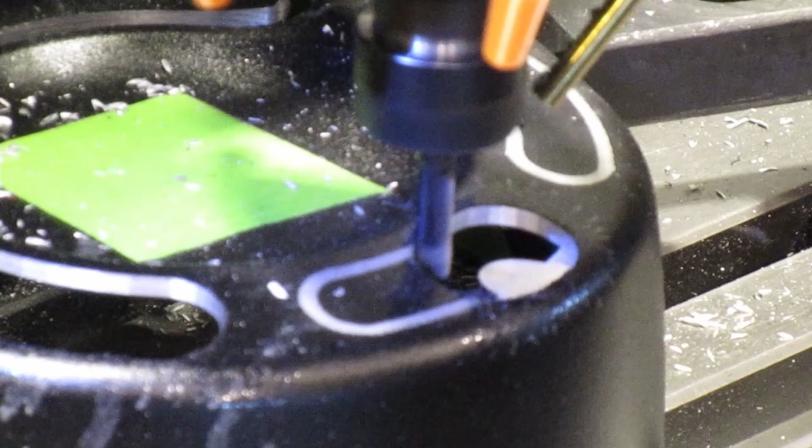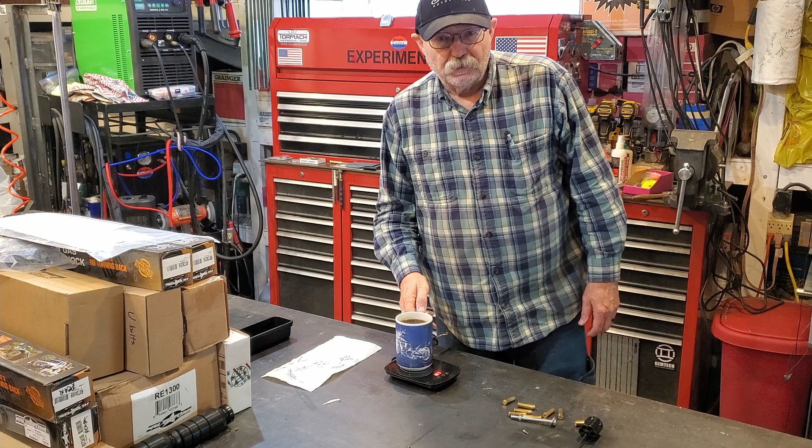Ideally I should be working on putting all new front and rear suspension on the Jeep, but I'm procrastinating, so I've come up with another little project I've been wanting to do for a while: a steering wheel knob. I'll put a couple of videos in right here to show you why people buy them and use them.

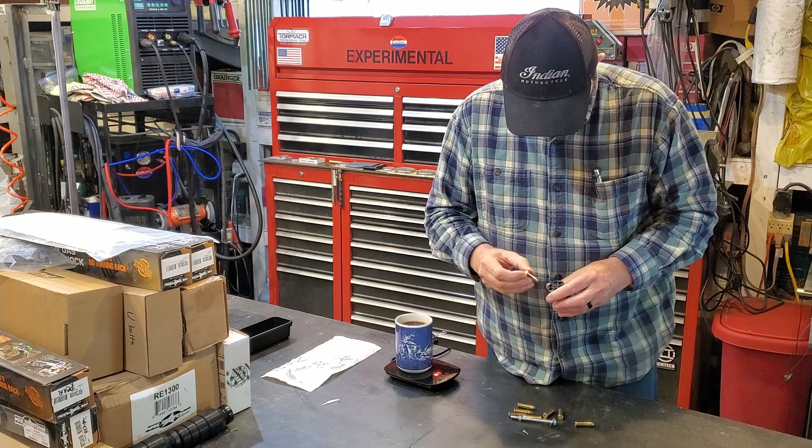So I started thinking about what I could make one out of, and I found a revolver cylinder on eBay. It's for a 6-shot .38 special revolver - probably, it said unknown model when I bought it. In my mind these are live rounds, but I will not use live rounds in the final piece. I think it'll make an interesting looking steering wheel knob. I'll pull the bullets and then fill each case up with some WD-40, which makes the primers inert so they won't fire. It'll be totally safe.

But anyway, I plan on making it out of this revolver cylinder. This cylinder has a little star which allows you to eject the rounds, so I'll want to retain that. I'm going to get rid of this shaft.

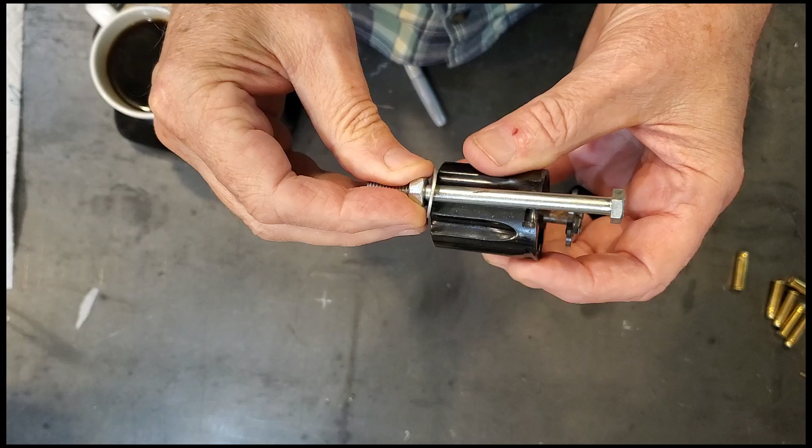This thing will rotate on a 1/4-inch bolt, so it'll go in something like this. But I plan on cutting the bolt off, obviously, and then hooking the star to the end of the bolt. My plan is to drill and tap 4-40 for this little machine screw, and it will go through the star and bolt into the end of the bolt.

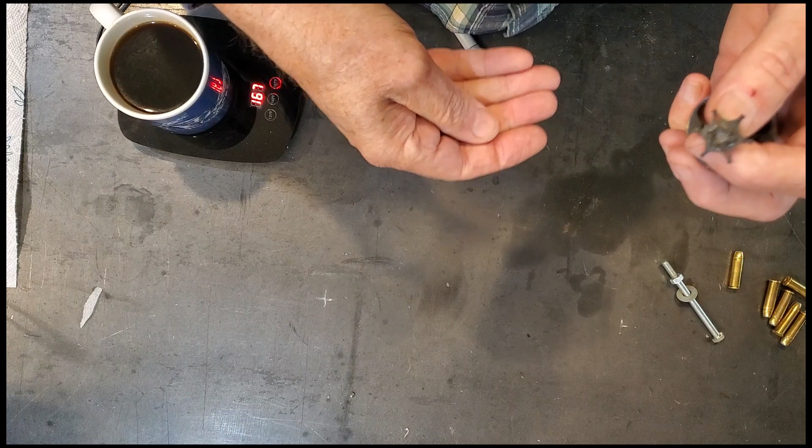Then I will cut off this shaft on the bottom and make it all smooth. So we'll just have the star by itself with a hole in it, and it'll be held on with this little 4-40 hex head cap screw.

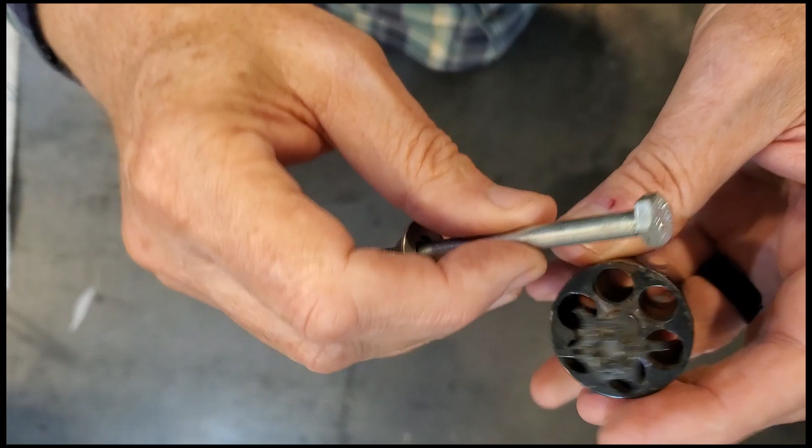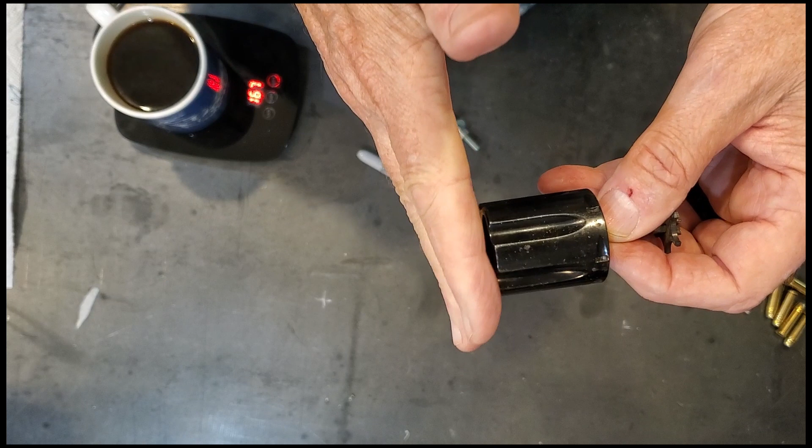After I get this cut off, then I will drill the center of this cylinder for a smooth fit on this 1/4-inch bolt, so it will rotate on the bolt. This thing is not going to go 100 miles an hour, so there's no need for a bearing. Then I will probably recess into this end a space for this washer and this nut, so that it will sit pretty flat on the little plate that goes around the steering wheel. So that's the current plan. We'll see how that works out.

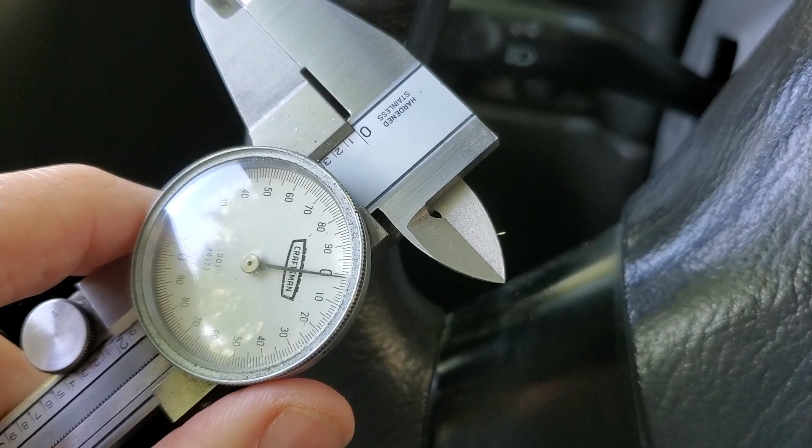And then with my dial calipers here, I'm going to measure the width and the height. So here's my little cheat sheet. The steering wheel is 1.180 left to right, and 1.000 top to bottom, and it needs to fit into across here and in that little corner. So I should be able to transfer that to some steel.

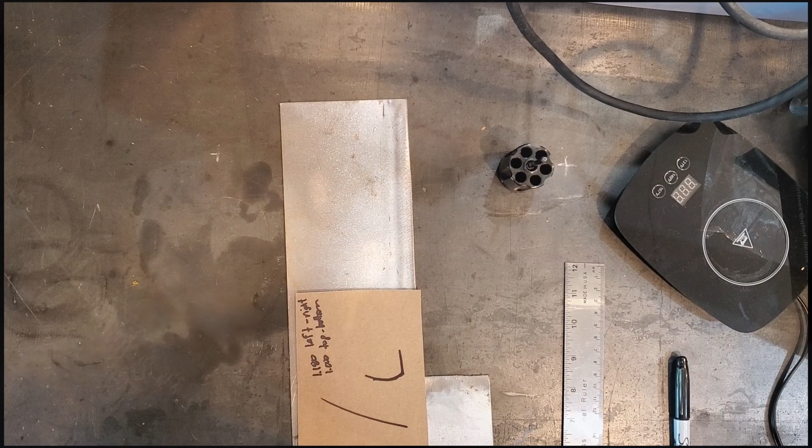Okay, we're back in the shop now. I've got a piece of 16 gauge here that I think I'll be able to use. And of course, here's my little cylinder. So let's do some educated guesswork here.

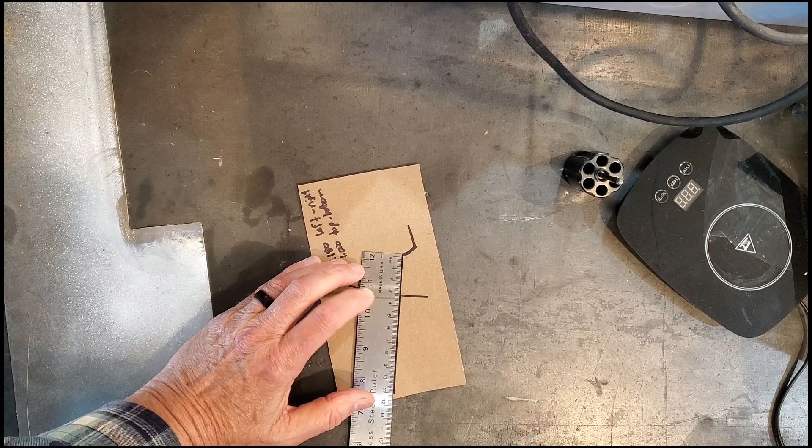So if this thing went across the steering wheel, I want to go across perpendicular to this edge. So let's say we do this, and we'll make it about 3/4 of an inch wide. So we'll draw another parallel line here.

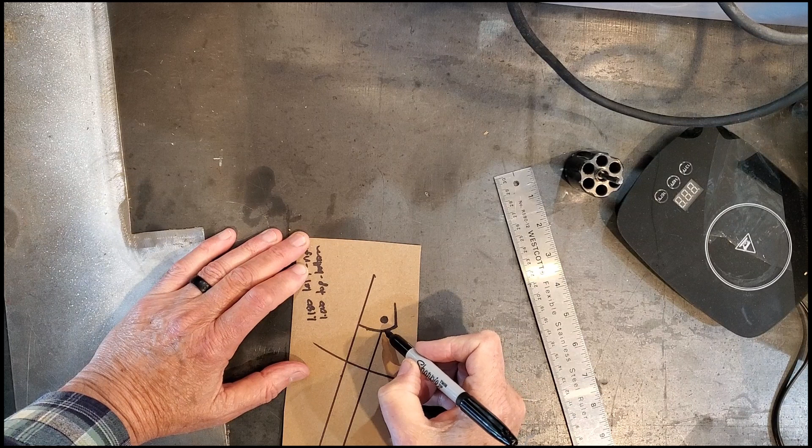And then I'd like the bolt to be about there, and it's going to be a 1/4 inch bolt. That's a 1/4 inch bolt right there. And so then the metal part can look like this.

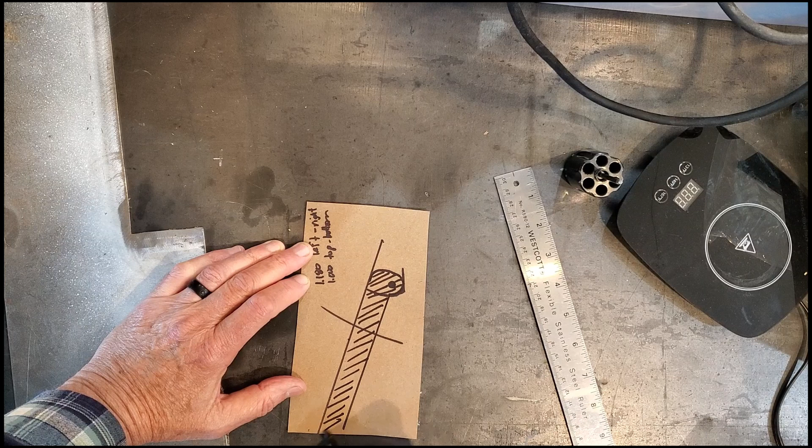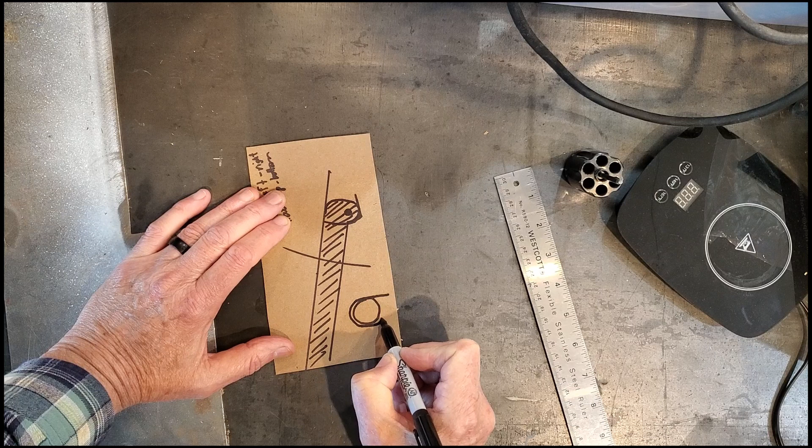And so this piece here is what I need. And of course, this piece sticking out here will wrap around the steering wheel. So if we look at the steering wheel from an end view, a cross-sectional view, let's say this is the steering wheel. This piece will go like this, around the steering wheel, back up and back over, and then the bolt will go through there.

That makes the knob flush with the top of the steering wheel, plus a little space, and it gives me a clamping force. And then if it looks like this on the top and the bottom, I'll be able to bolt the two together. So that's the theory. We'll have to see how well that turns out in practice.

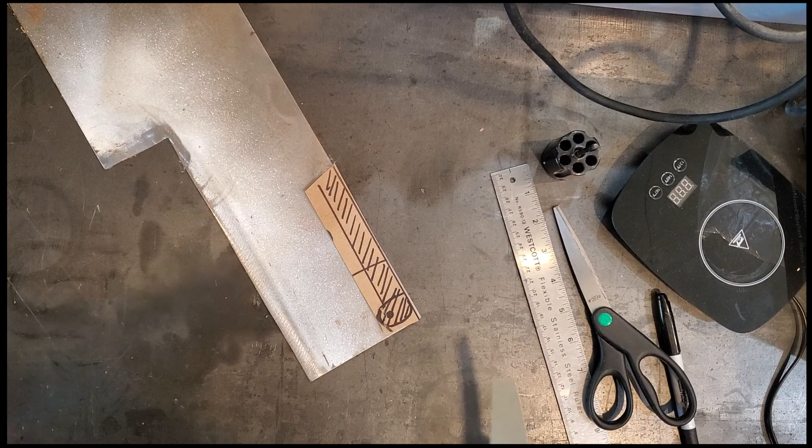So we've cut away some of the excess. This has to remain wide because I need another one of these features down here, but it's an unknown length. So I will basically cut it out wide, form it so that it matches the steering wheel and gives me that little step function right here.

And then I will build the two little bump out details into it. So that's kind of where we are right now.

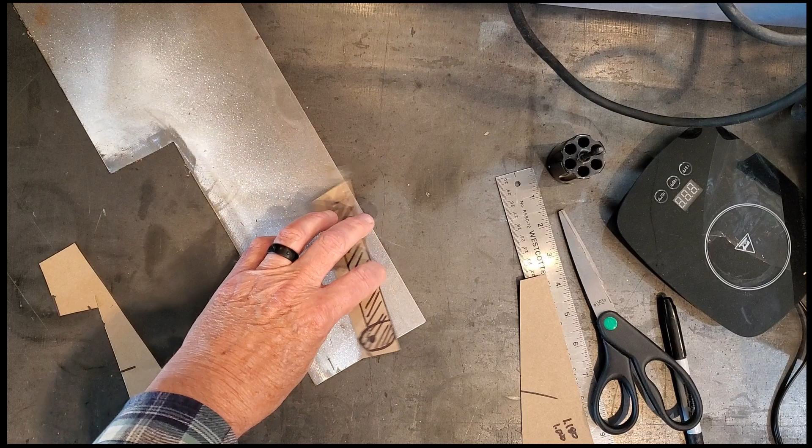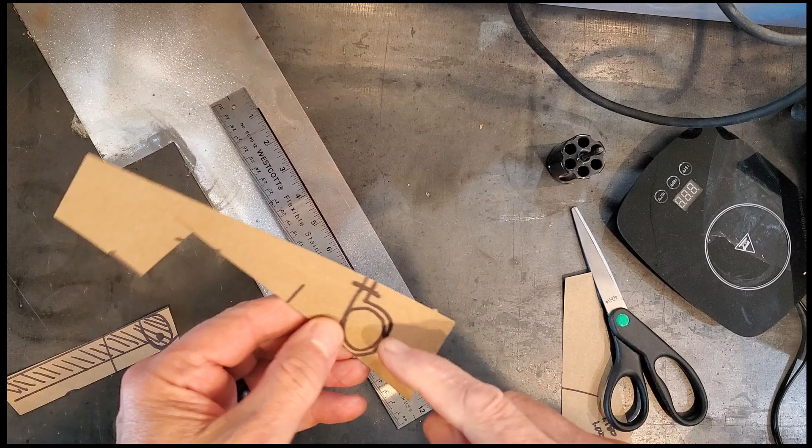So that's about 1 3/16. So we'll do 1 3/16 up here. We're just going to start with a 1 3/16 inch wide strip of metal. And I'm going to make it plenty long, since I don't know how long it needs to be. Since it's about 1 inch, that means the circumference is 3.14 inches, plus a step out there and a step out there, so 5 inches ought to be enough. We'll just start with 5 inches.

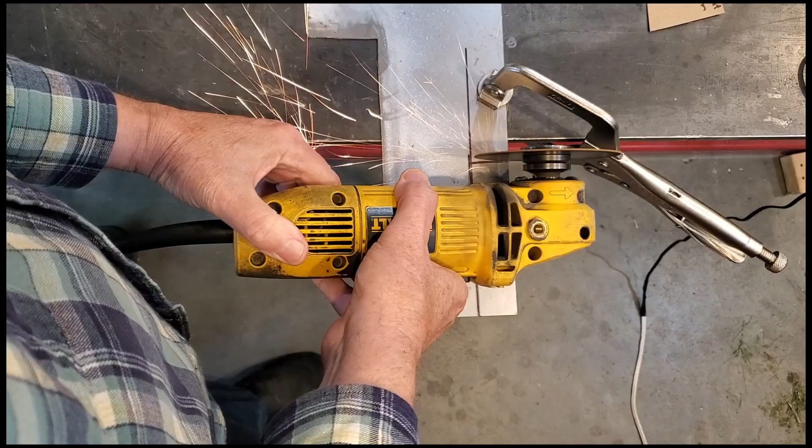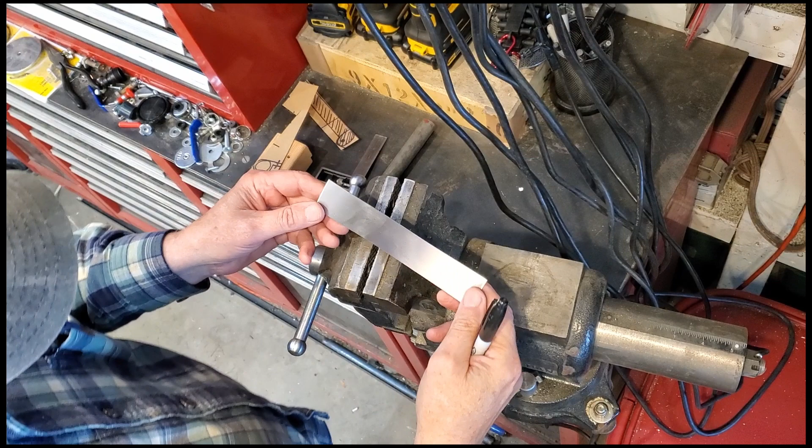Okay, we got our blank here, 1 1/4 by 7. I decided I really wanted a little bit more extra. So the first thing we're going to do is put this 90-degree bend in. It'll be harder to do after I get it curled up, so I'm going to do it first. Trimmed off. We'll try there.

So the best part about the first bend is you can't bend it the wrong way. Okay, square it up a little bit. All right. If you don't want hammer marks in your final product, well, use a piece of wood.

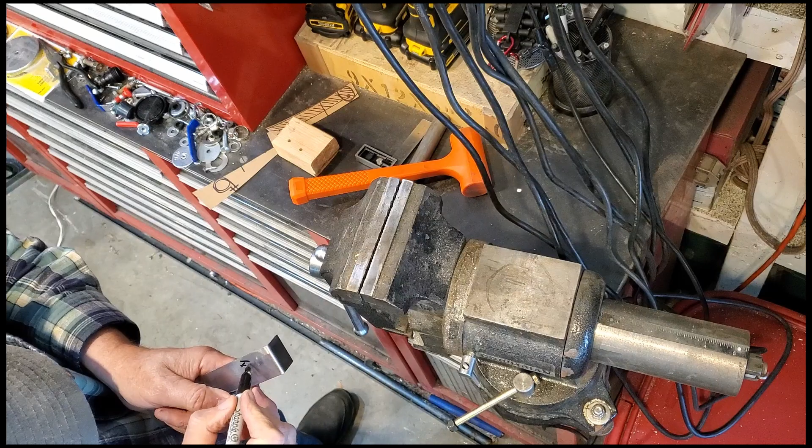And we want this first bend to be about 90. Okay, here we go. Pretty square. Oh, very square. Okay, that's good. Now we want this to curl up like this. So this is the inside. Okay.

Means I'm gonna bend it over a piece of 1-inch DOM tubing. It's a quarter wall, so it's going to be plenty strong. Stick it out a little ways. We will clamp it. That needs to be in, so I need to have this down. Okay.

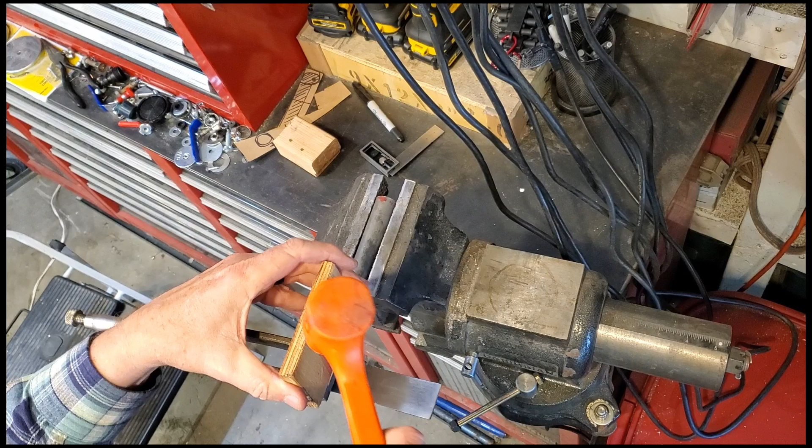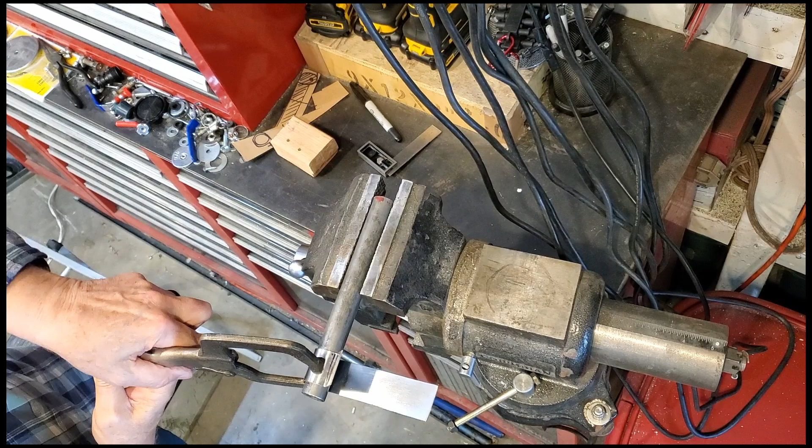All right, you're beginning to have the shape. Okay, see if we got the right depth. All right, we've got about 3/4 of an inch to this, which gives me plenty of room to clamp.

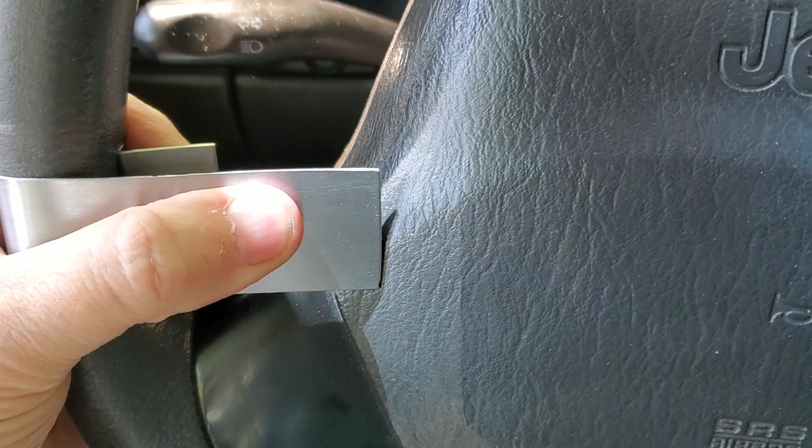So let's go try it on the Jeep and make some marks. And we've got the part partially formed. I'm going to have to open it up a little bit so that it will go around the steering wheel, and then we just force it back around. Got to have strong thumbs, apparently. Anyway, we force it back around. So here's about square with it. It's not quite square.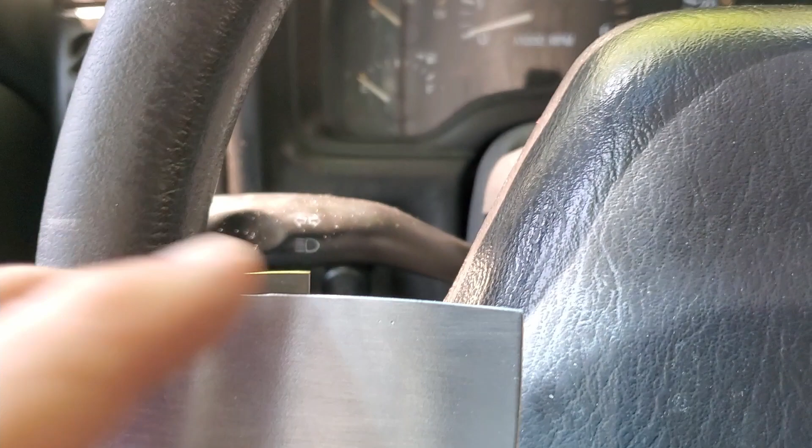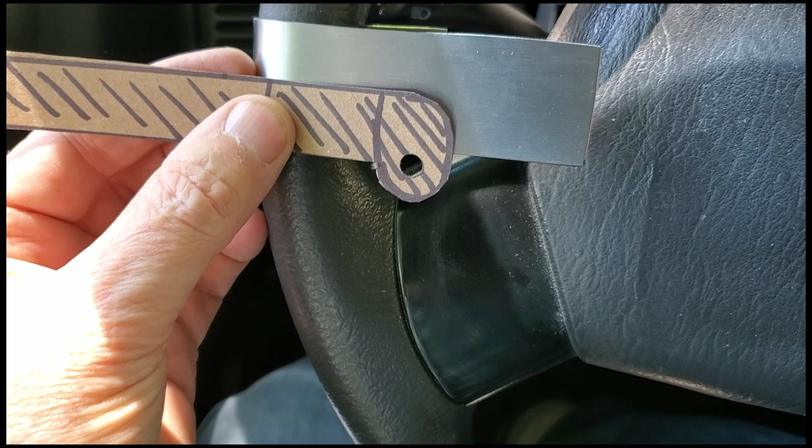But anyway, this piece is roughly where I want it, close enough for me to make some marks. I flushed out the pattern a little bit, trimmed up some of the edges, and punched a hole in it with a hole punch. I think I want it to go about there in real life, so if I move it straight up on the part, then that ought to be where I should mark it.

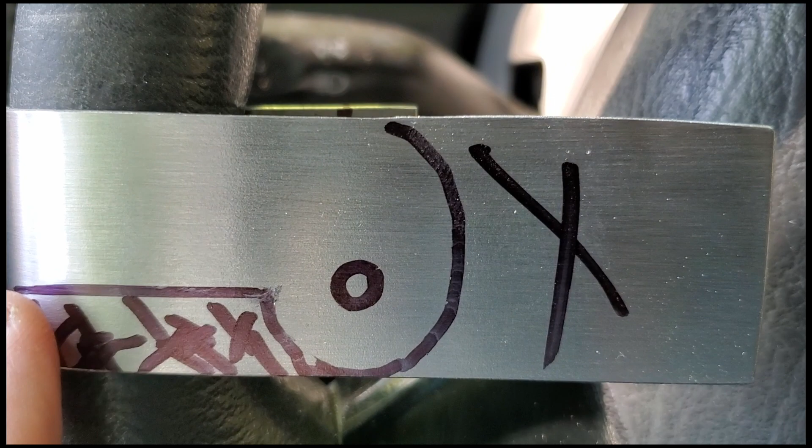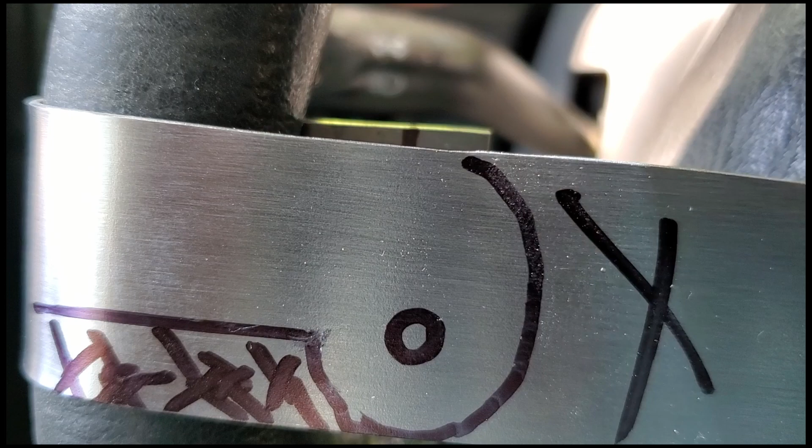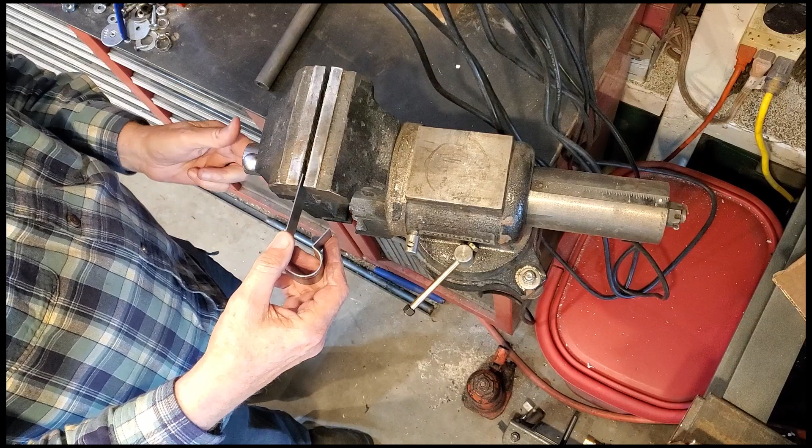After we mark it, we will cut this material away, put a hole, and then this material here will go away, and this material here will go away too. I marked a hole on the back, the center line of the hole, so that I'll be able to get it lined up correctly. So we're getting closer. Okay, let's cut the piece out of the big stock.

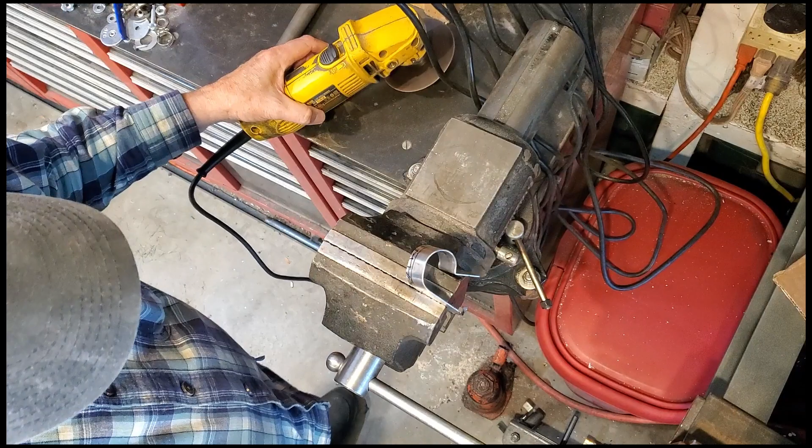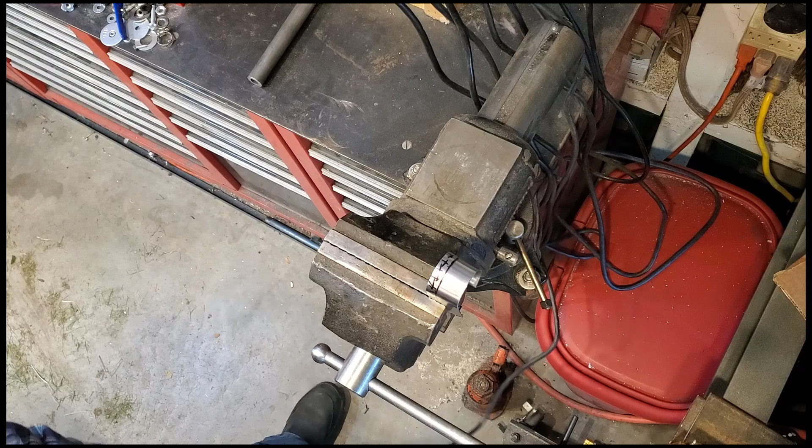Okay, now we're gonna thin it up a little bit.

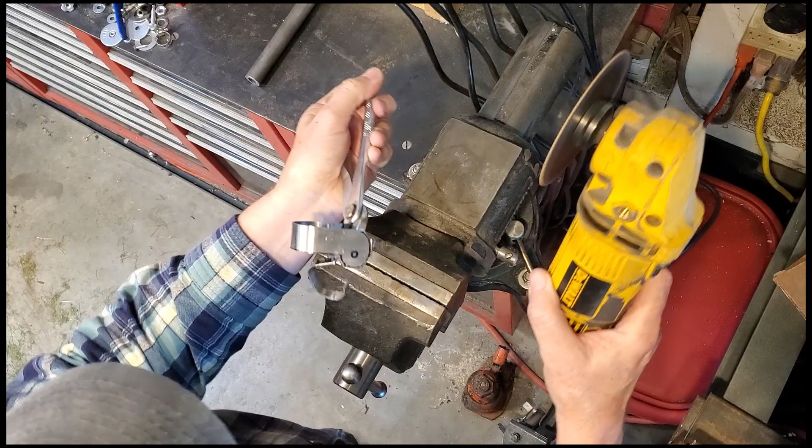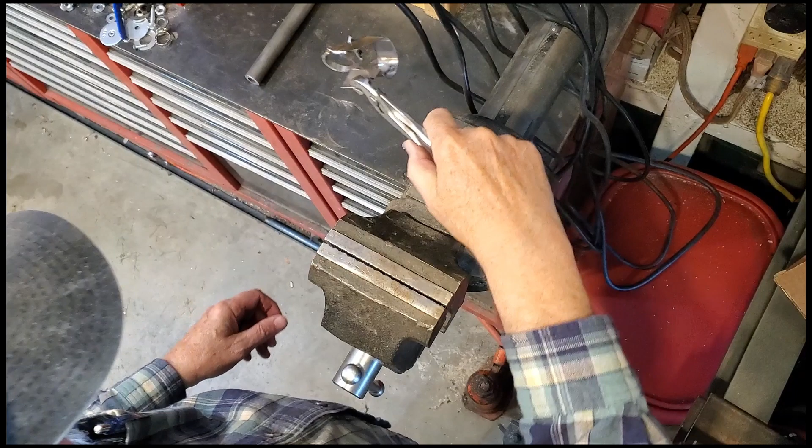Well, the garbage truck is here, but at any rate, we've got a general shape, and one of the things the belt sander is great at is cleaning these kinds of things up.

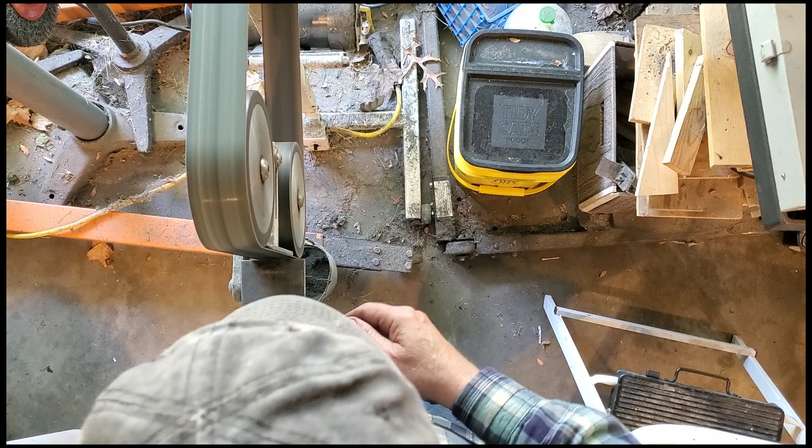So I'm going to do the top first, then I will drill the holes, and then clamp the piece together with a spacer, and then make the bottom match the top.

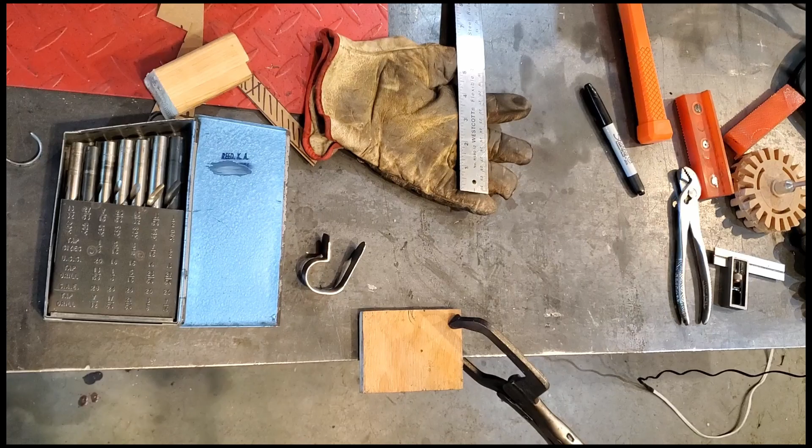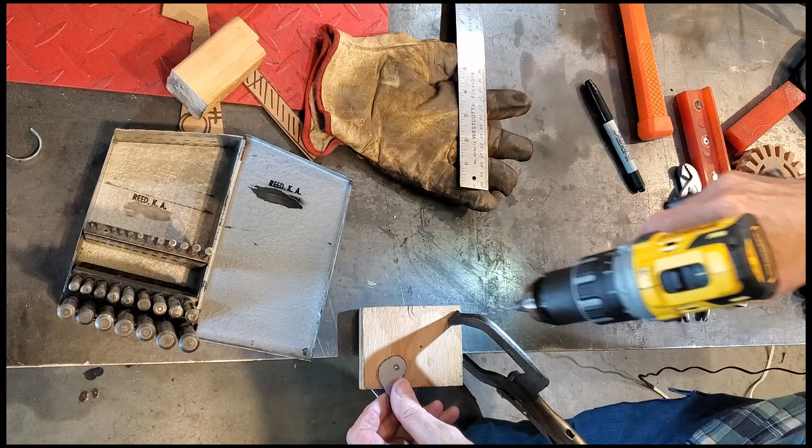Okay, we'll drill a pilot hole first, we've already got it center punched. Okay, that's a good hole. Now we'll drill 1/4 inch - actually, one size over 1/4, which is 15 thousandths of an inch over 1/4, 64th.

And this could catch and grab and rip my finger off, so we will use a pair of pliers. Nope, all was good, but I like my fingers a lot.

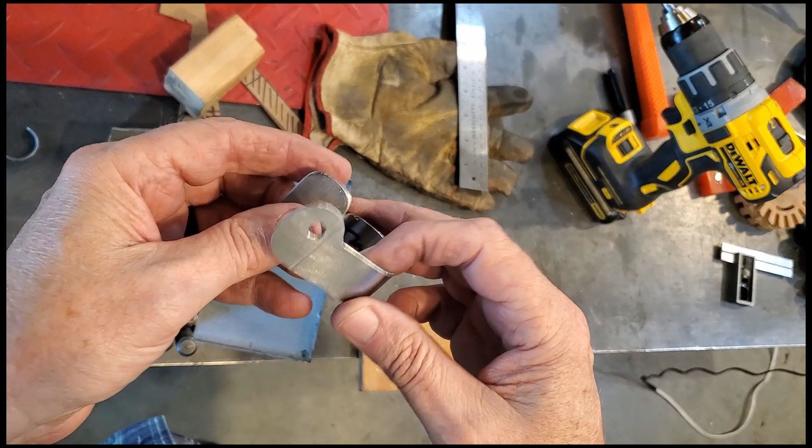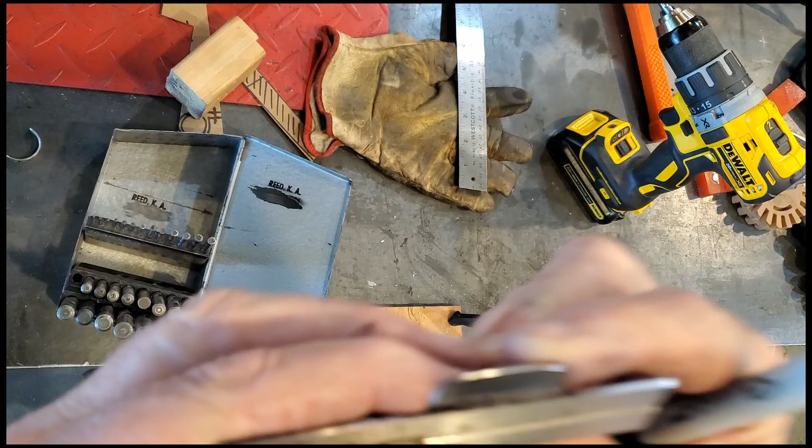Okay, we've got the edges cleaned up on the wire wheel and the Scotch-Brite wheel. They got one hole, and we know that that other hole is along this line.

So we mark this, and then transfer it to the other side, actually. There we go. And now we move over. Let's measure this - 13/16 of an inch. And we will have the position of the other hole, so they will be right above each other when the clamp is closed on the steering wheel.

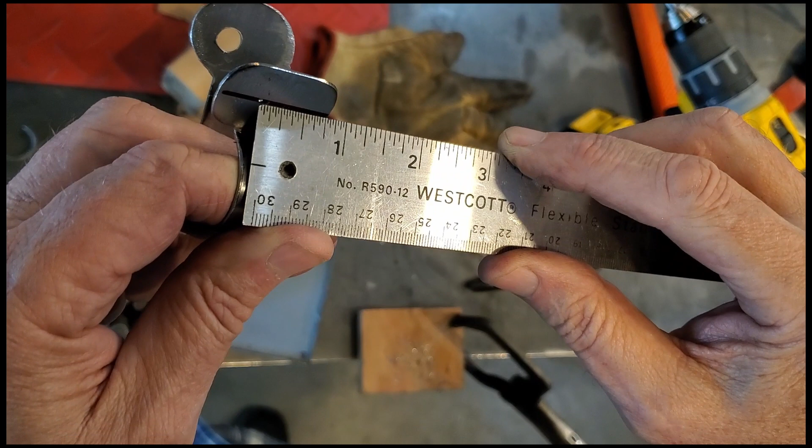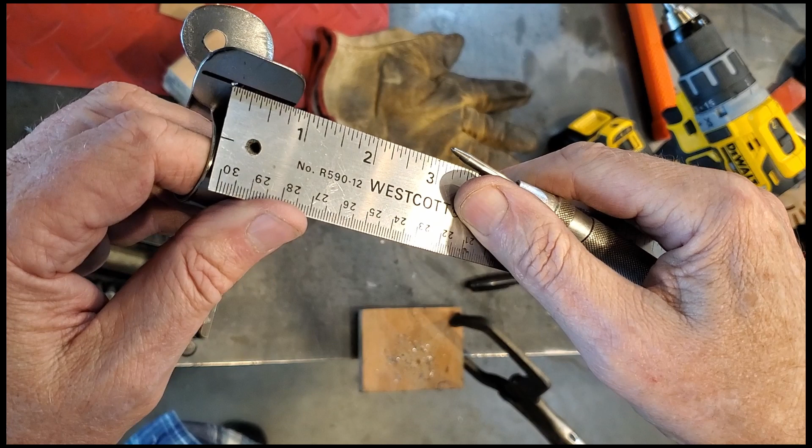Okay, now we check. Nope, the center punch needs to be moved a little bit. I don't know if you know, but you can move a center punch just by punching it again at an angle. So let's see if it's in the right place now. Yes, center punch is in the right place now, so then we can drill it.

Pilot hole first, and then 17/64. Next, with a pair of pliers...

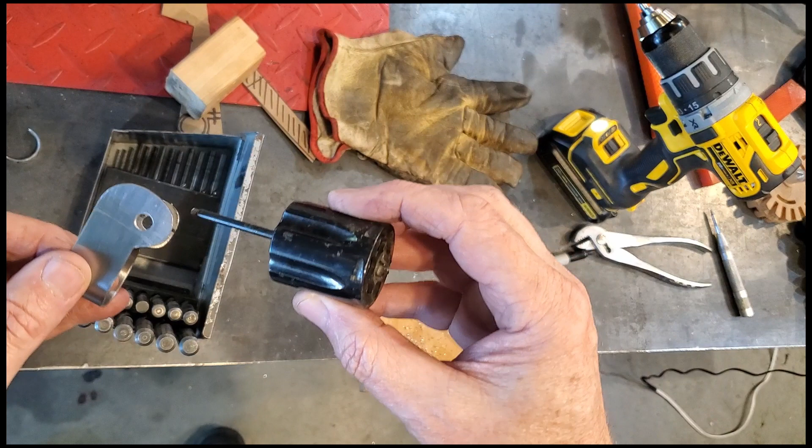Okie doke, that is going to hold my knob. I haven't got this piece machined yet, but it's going to look like this.

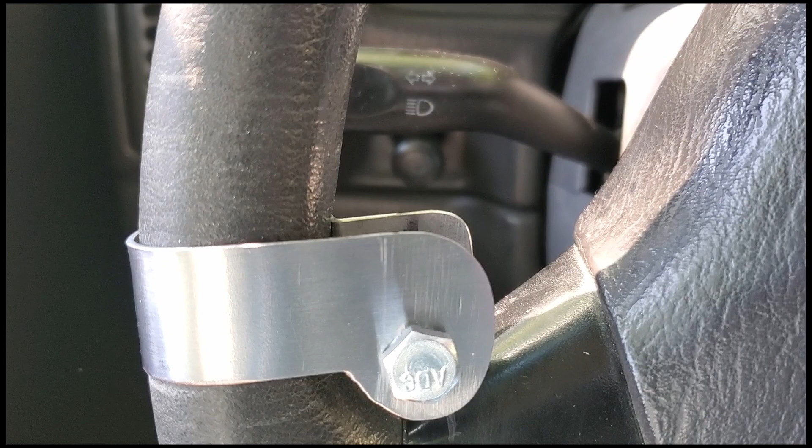Okay, a little video of the Jeep test. It looks like it's going to work pretty good. I still haven't trimmed the back piece to match the front piece, but now that I've got a bolt that'll go through it, I'll put some washers in there and do that. When it's all black, it'll probably disappear pretty good, not obvious to the observer. So I'm pretty pleased so far.

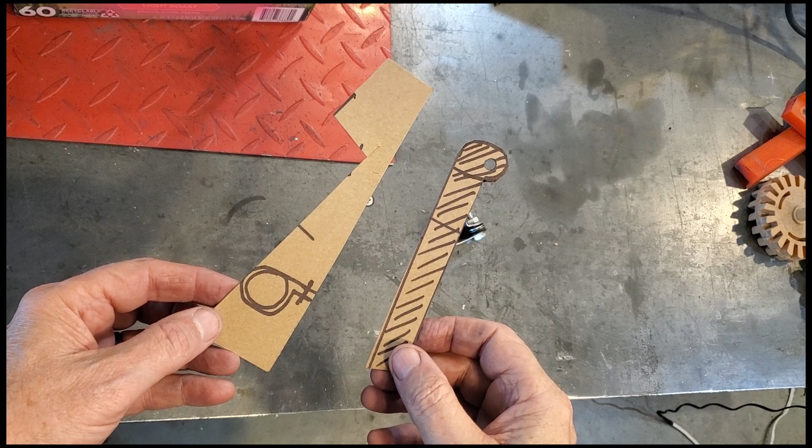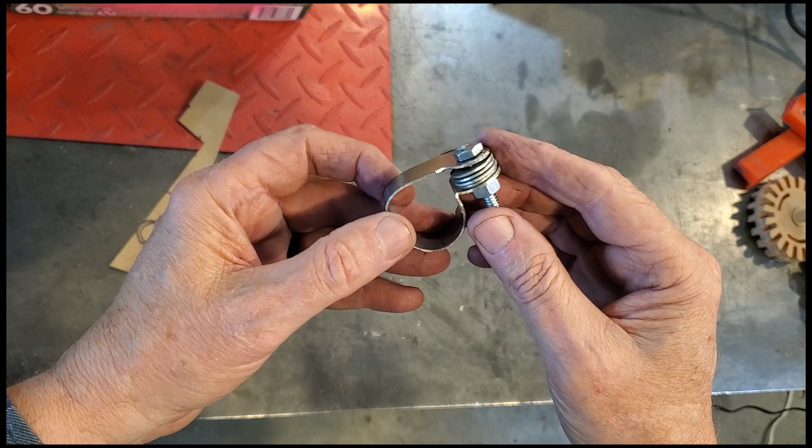Okay, we went from this to this in about an hour. It still needs the edges smoothed a little bit, and a couple of coats of black paint on it, but it is ready to receive the knob. Machining the knob is next.

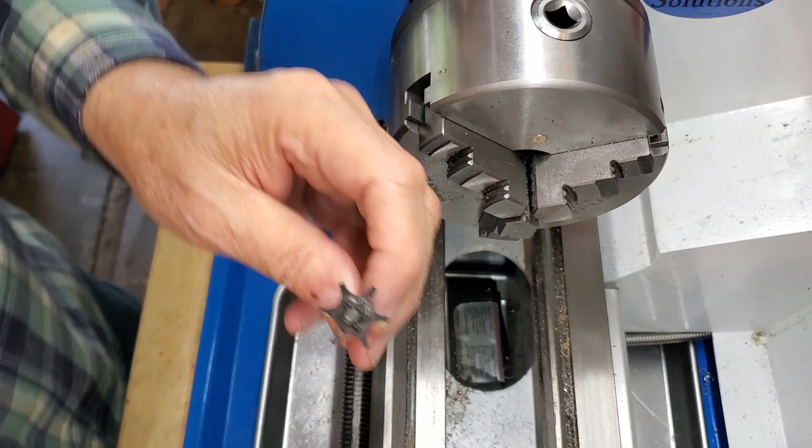Okay, we're on the lathe. We're going to drill a clearance hole for 4-40 right down the center of the star, and then we're going to part it off.

So I want to put it in the chuck pretty close, but still with room enough to part it off. Okay, that ought to be room enough to part it off. Let's see how true it's running. The shaft of this star has some features in it that keep it from turning inside of the cylinder.

And I can see that I've got it clamped poorly right now. Okay, now we've got it running true, so I have room enough for my parting tool. Okay, I do have clearance for a parting tool, so setup is complete for that.

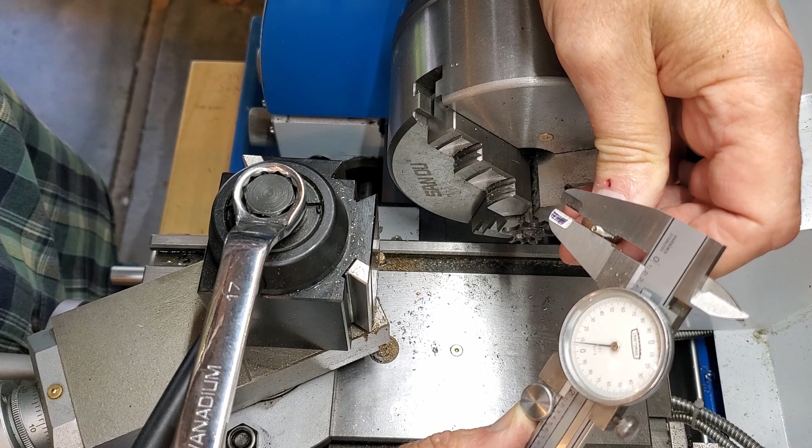Alright, my 4-40 screw, machine screw looks like it's about 107 thousandths, so we got a clearance over there. We'll do 116 thousand. Okay, we're just touching right there.

Cut really deep, and that should be all the way to that part, so I think we're done. Let's try a little cut-through. Okay, we got a good clearance hole. Here we go, now we start off flush with the back.

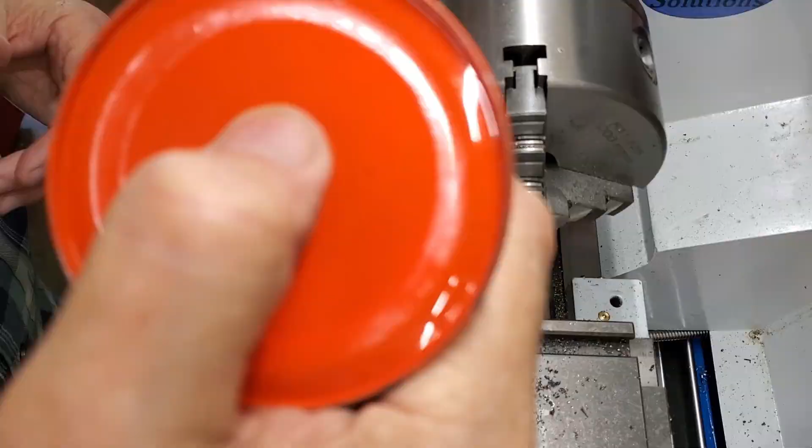A little parting tool, a little bit of oil. I think our clearance is good. There's the back of the part.

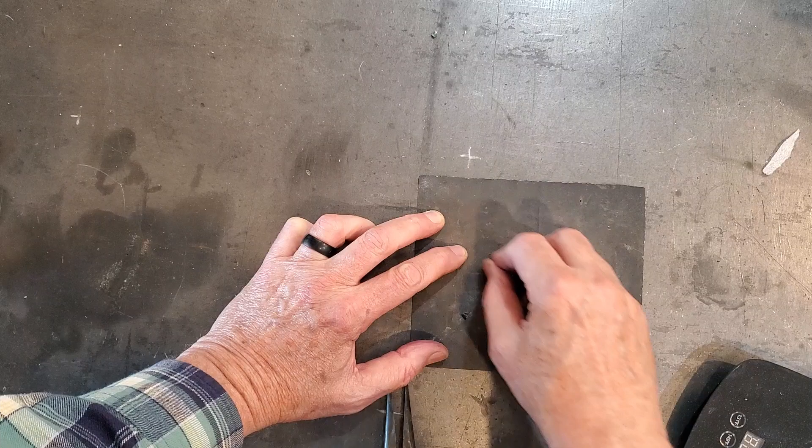Okay, here's some 240 grit. You should be able to get pretty darn flat this way. Let's see, right there. Oh yeah, there's no perceptible lip on there anymore.

And we'll be sure to clamp on these high spots here. Turns out that this is a 6-shooter, so there'll be 6 of them, so a 3-jawed chuck is going to work fine. Alright, test spin.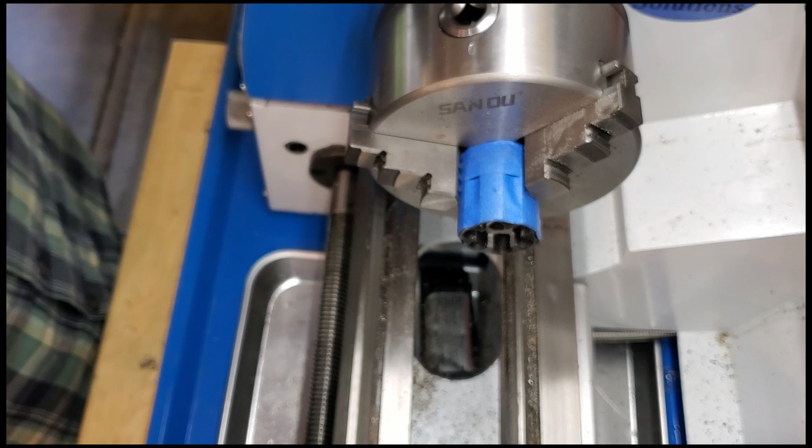So there's my recess for the bolt in the washer. So like this, and then the bolt goes all the way through. Actually, it goes through this way, and it'll have its top cut off. See, I've got a little burr right there, but I'll have to take care of that.

And it'll have its top cut off, and then in this end there will be a 4-40 threaded hole that the star will bolt to. And that's kind of all there is to it. Okay, the only thing left is to cut this to length.

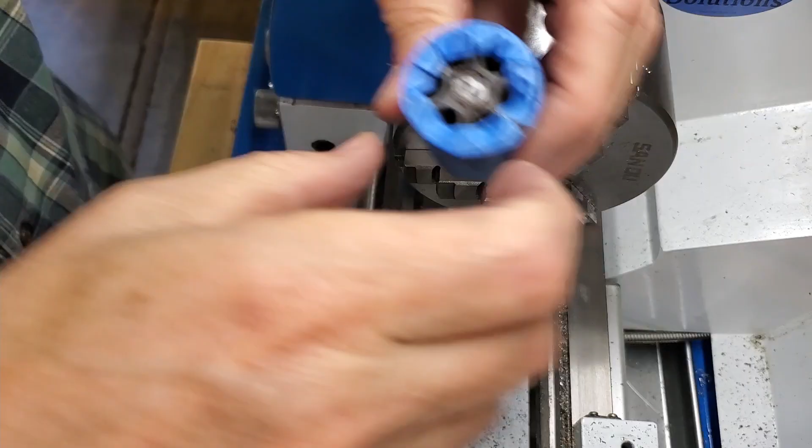Okay, here's our first test fit. It's sitting proud of the cylinder floor, but now I gotta take this tape off in order to try this.

So here's our star and our screw. I'll paint that screw black. Actually, I ordered a black oxide one so it would be tougher. The oils in the human skin can attack things after a while. So, alright, there we go.

Alright, that's a nice flush fit with this pushed all the way up. So by golly, I think we've got her.

Okay, I got a little errand to run, so let's take this guy for a spin and see how it works. Oh yeah, that's pretty easy. Yeah, this is going to work out great. It's just about the right position. It's easy to turn, I do a push and a pull with my arm.

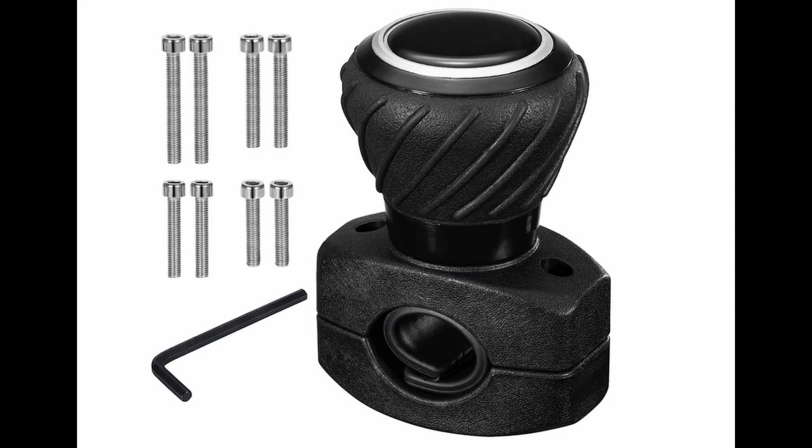I've also chosen a knob, in this case a revolver cylinder, that's not very big, not very tall, so I'm going to be able to use the steering wheel normally when I'm driving down the highway, or just doing straight stuff. This will be nice for backing up a trailer, for maneuvering in the outdoors when you're off road.

And it's pretty easy to grip. I like it, it's pretty small. And it turns so easily, there's no real force on the hand. And one can be precise with it. It's no problem driving normally using it. Yeah, I think I like it.

Getting back to the ones that you see commercially, sometimes they mount the knob outside of the steering wheel, which means you can't use the steering wheel normally. And some of them mounted in the center of the steering wheel, same issue, you can't use the steering wheel normally.